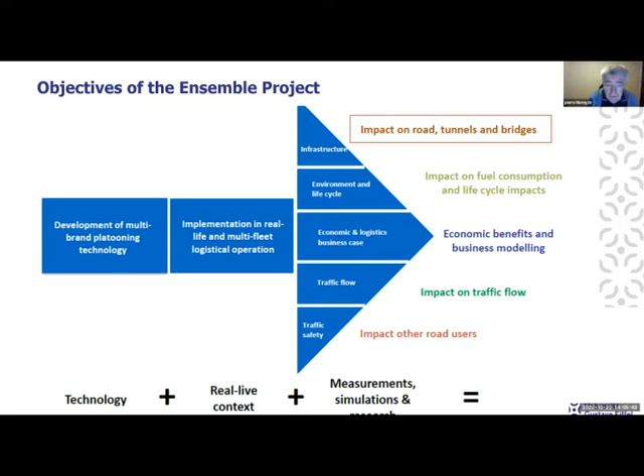You can find information about all this in the project, but our part was mainly on the impact on roads and also tunnels and bridges, though I will speak mainly about roads. So what is the impact of platoons on roads, especially on asphalt pavements? Because in France we use mainly asphalt pavements, very little cement-treated materials and concrete pavements. So we work on asphalt pavements.

If you look at the strains produced by a platoon, you can see here an example. The strains are different from what you get under a single vehicle, because you have several very closely spaced trucks. The effect is that you have an increase of strains under the second and third vehicle due to the viscoelastic behavior of the pavement. And if there is also control of the lateral position, you have reduced lateral wandering with the platoon, so you also localize the damage on the pavement.

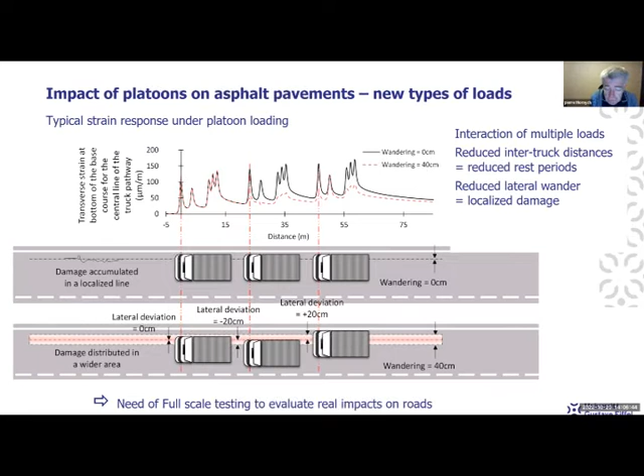Because the real behavior is relatively complex on the pavement, we decided it's necessary to start by doing a full-scale test to evaluate the impact of these platoons on roads. So we did a test on an instrumented pavement in the project, on a facility called the Idiada test track, which is located in Spain.

We instrumented a pavement structure for this test. The pavement structure included, as you see at the bottom, 3 asphalt layers: a wearing course, a binder course, and a base course. We instrumented mainly the binder course and the base course, with strain gauges and also with temperature sensors. The objective was not to monitor rutting, but mainly to monitor the strains and then evaluate fatigue of the pavement due to these strains.

We had about, I think, 30 strain gauges, placed longitudinally and transversally, at 2 depths and also at different lateral positions, in order to capture the effect of the wandering, the lateral deviation of the trucks.

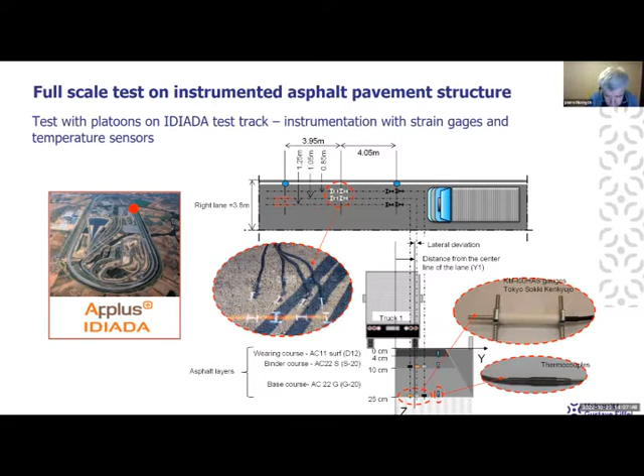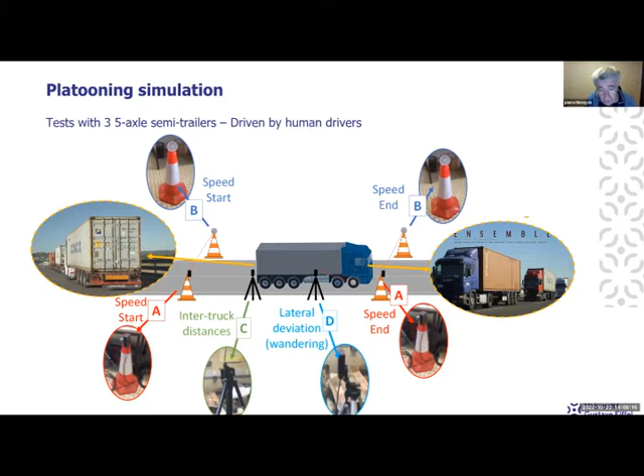We also needed to monitor the position of the trucks. The simulations were done with trucks driven by human drivers because it was done at the beginning of the project, and the platooning control was not yet fully operational. So we did it with human drivers. To monitor the position of the trucks, we used laser distance sensors, and we monitored the speed, the inter-truck distances, and also the lateral deviation of the trucks during the tests.

We had 3 trucks, and the idea was to compare the effect of passages of a single truck and effects of the passages of a platoon. Because asphalt pavements are very sensitive to temperature, we did the tests at 2 different periods, in the winter and in the summer. In each test campaign, we had different vehicle speeds. We had a lot of passes at 4 different speeds: 40, 60, 70, and 80 kilometers per hour. But we kept only one inter-truck time gap or distance, which was a time gap of 0.8 seconds.

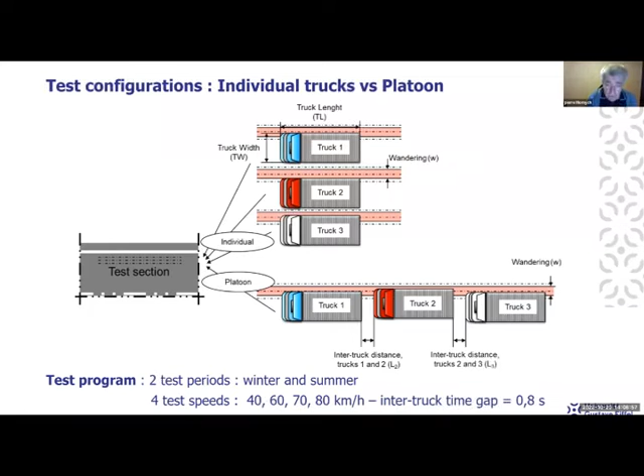We recorded a lot of strain signals under the passing of these different trucks. Here you can see examples of longitudinal and transverse strain signals at the bottom of the base course in the winter and in the summer.

Here you have an idea of the effect of the platoons. First you can see that the strains are much higher in the summer than in the winter. Then you can see that in the summer, you have increasing strains under the second and the third truck of the platoon due to viscoelastic behavior of the material. You also have delayed recovery after the passage of the trucks, which you can see here.

We also found that for our test, the transverse strains were higher than the longitudinal strains. So because we were interested mainly in the maximum strains, we looked mostly at the transverse strains.

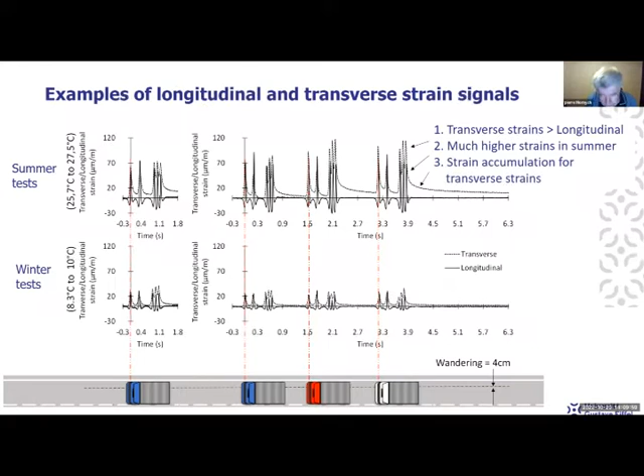First, just a comparison of the measurements. Here you have the maximum strain amplitudes observed under a single truck and under a platoon, in winter conditions on the left and in summer conditions on the right. You can see that in winter, with temperatures around 10 degrees, where the behavior of the pavement is more or less elastic or where the viscoelastic effects are reduced, you have practically the same strain levels under single trucks and under the platoon.

In summer, it's very different because the temperatures were higher, 25 to 27 degrees in the base layer. We had much higher strains under the second and third trucks of the platoon in summer than under individual trucks. And if you compare the change of strain between winter and summer, the increase of strain is also much higher under the platoons than under the single vehicles, due to strain accumulation effects.

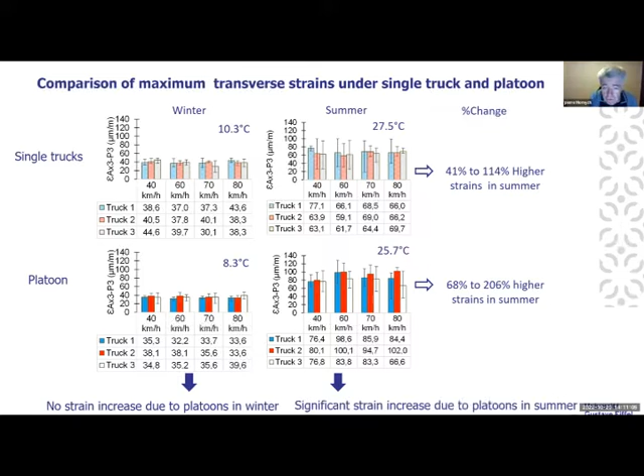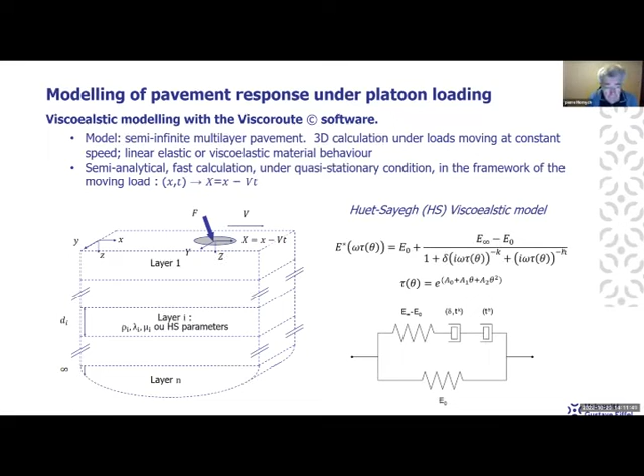The idea then in the project was to try to model and reproduce these effects. First we tried to model the viscoelastic response, using software developed at our university called ViscoRoute, which is a multi-layer viscoelastic calculation software. It calculates the response of the pavement in 3D under loads moving at constant speed, and the material layers can be linear elastic or viscoelastic. For the viscoelastic behavior, we use the Huet-Sayegh model, which reproduces very well the behavior of asphalt materials. So we first tried to calibrate the model on the measurements.

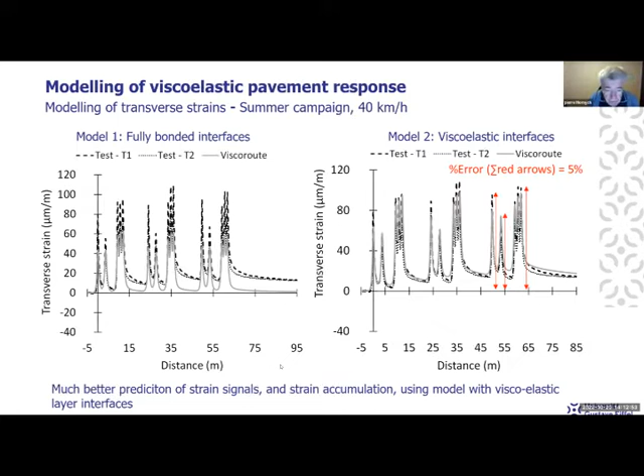Then we tried different assumptions, and we found that if we also model the interfaces as thin viscoelastic layers, we can get a much better reproduction of the measured strains - both the effect of strain increase under the second and third vehicle, and also the slow strain recovery after passage of the trucks. So we get much better results with the model using viscoelastic layer interfaces, and we calibrated this model on the measurements.

In the second phase, we also used this model to make parametric studies to see the influence of different parameters. Here you have an example: we studied the effect of lateral wandering on the strains. We compared first the case where the trucks were perfectly aligned with zero lateral wandering, and then where the three trucks were misaligned transversally with lateral wandering of plus 20 centimeters and minus 20 centimeters.

And you can see the effect. The black curve corresponds to the trucks with no wandering. You have a high strain accumulation after the passage of the second and third truck. When you increase the wandering, you reduce considerably the strains under the second and third truck, and you reduce the maximum strain level to which the pavement is submitted by spreading the loads laterally.

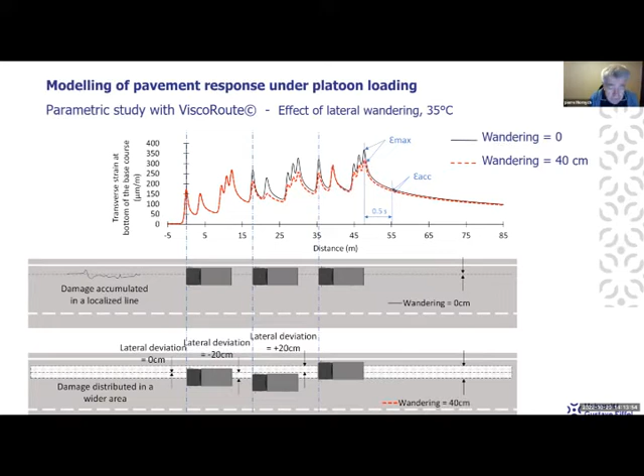We also studied the effect of the time gap between the trucks. Here you have simulations of transverse strains with 3 time gaps: 0.5 seconds, 2 seconds, and 3.5 seconds. With the short time gap, you have a strong strain accumulation. With the time gap of 3.5 seconds, which is relatively high, maybe higher than what you would apply in a platoon, you get practically no strain accumulation, similar to single trucks.

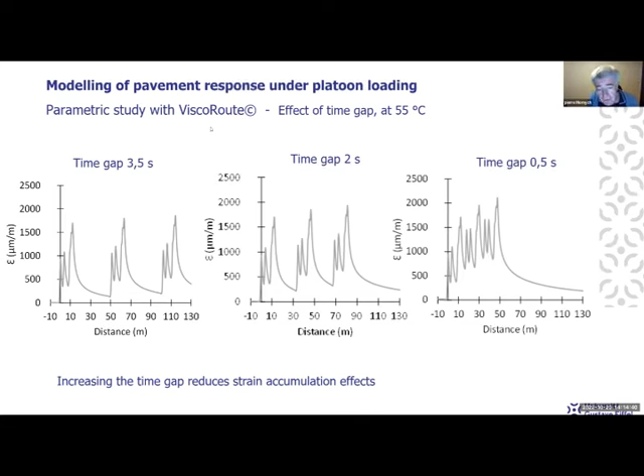So ViscoRoute, when it is calibrated on the results of the experiment, can be used to predict the effect of different truck configurations and to optimize the truck configurations to reduce the impact on the pavement.

And then we also tried to predict the fatigue behavior under platoon loading. For that, we used a fatigue model for multi-axle loads, developed in our laboratory a few years ago by Homsi. The normal fatigue law used in the French pavement design method relates the number of cycles to failure only to the maximum tensile strain.

In this multi-axle fatigue model, you have 3 other parameters: parameter NP, which is the number of peaks of the signal; parameter AN, which represents the surface of the signal, the average strain intensity; and D, which represents the duration of the strain signal.

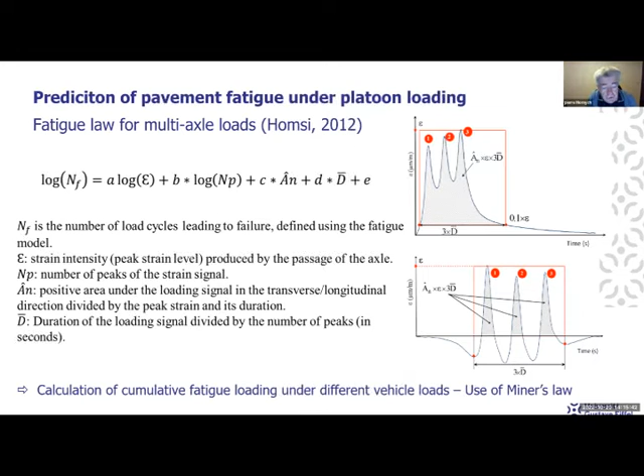So we calibrated this model for the material used in the tests, and we tried to calculate the cumulative fatigue loading under platoons.

So we compared different scenarios: a reference scenario with no platoon, only individual trucks, and then 4 scenarios with platoons. In scenario 1, platoons ran only in winter and individual trucks in summer. Scenario 2 was the reverse: individual trucks in winter and platoons in summer, half the year during the cold period, half during the hot period.

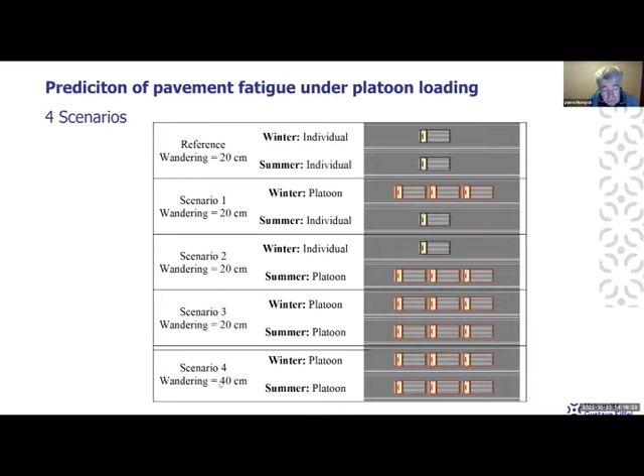In scenario 3, we had only platoons in winter and in summer. In scenario 4, we had also only platoons, but with a larger lateral wandering, 40 centimeters instead of 20 centimeters. We tried to predict the fatigue life with these different scenarios for the pavement tested in our experiment.

Here you can see the results in terms of fatigue life leading to a damage of 20%. It's a method of calculation of damage that we use in the French design method. So you have the fatigue life, or the remaining fatigue life, since it was an existing pavement, for the different scenarios.

You can see that between the reference and scenario 1, when you have platoons only in winter, there is no difference. You have the same fatigue life.

In scenario 2 and scenario 3, where you have platoons in summer, you reduce relatively considerably the fatigue life. You reduce it by almost a factor of 2.

And then in scenario 4, when you increase the lateral wandering, you improve the fatigue life again. You are not close to the reference, but you are between the reference and the worst scenarios.

So the conclusion is that the increase of pavement fatigue due to platoons is observed mainly at high temperatures, where you have these strain accumulation effects. Otherwise, the strains are the same as under an individual truck, so there is no difference in fatigue. By increasing the lateral wandering, you can significantly reduce this fatigue phenomenon.

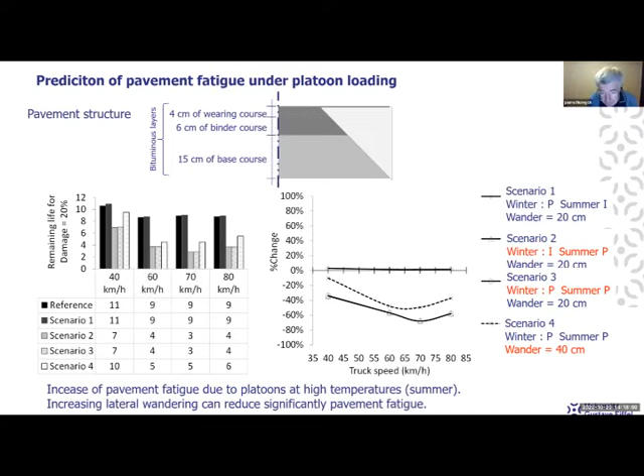We also did other simulations for other conditions, but this is just to give you an idea of the type of work that we did.

So from the full-scale testing, we found that there is a significant increase of strains under platoon loading due to the viscoelastic behavior of asphalt layers. This effect is mainly observed at high temperatures, when the behavior of the pavement is strongly viscoelastic.

Then with the viscoelastic model, we found that a model with viscoelastic layers and viscoelastic interfaces reproduces well the platoon strain signals. We were able to use this model to predict different platoon configurations, and possibly to optimize platoon configurations to reduce impact on roads or to reduce maximum strains.

And then with the multi-peak fatigue model, we were able to predict the fatigue under platoon loading, and we found that there is an increase of fatigue mainly at high temperatures, and that fatigue can be reduced by increasing lateral wander and also inter-truck distances.

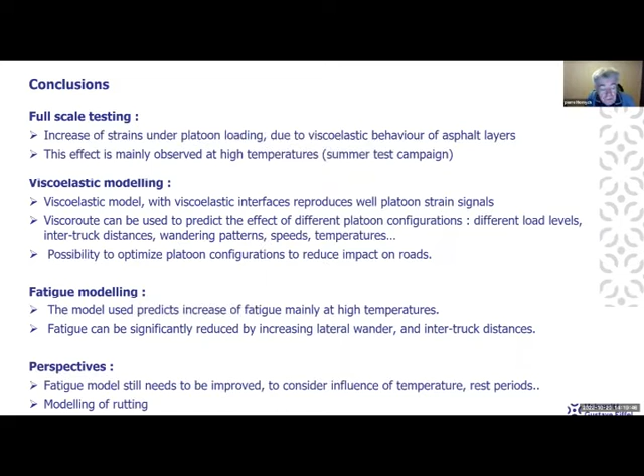We are still working on this project, and we would like to improve the fatigue model, because it takes into account multiple loads but doesn't take into account well the influence of temperature. For example, fatigue at high temperature should be improved, and this effect is not taken into account, and it does not take well into account the rest periods between loads either. So we would like to improve it first through laboratory testing, and then develop a better fatigue model. We were also thinking of trying to model the rutting under multiple loads.

Now I will pass to the second part, development of infrastructures for charging electric vehicles. As electric vehicles develop, people try to find new solutions for charging heavy vehicles. For heavy vehicles, there are several solutions to reduce carbon emissions or energy consumption: the use of biofuels, electric batteries, hydrogen, and also electric road systems, which can be used to charge vehicles by the road. In France, we are looking very seriously at this solution of charging electric vehicles by the road.

It consists of charging the battery by different methods to improve the range of vehicles without the need for very heavy or expensive batteries. There are three main technologies now tested or developed in Europe: conductive charging by catenaries, like a train, with catenaries above the truck; conductive charging by the ground, using metallic rails in the road; and inductive charging, using the induction phenomenon, with coils placed in the road and in the vehicle, transferring current from the road to the vehicle.

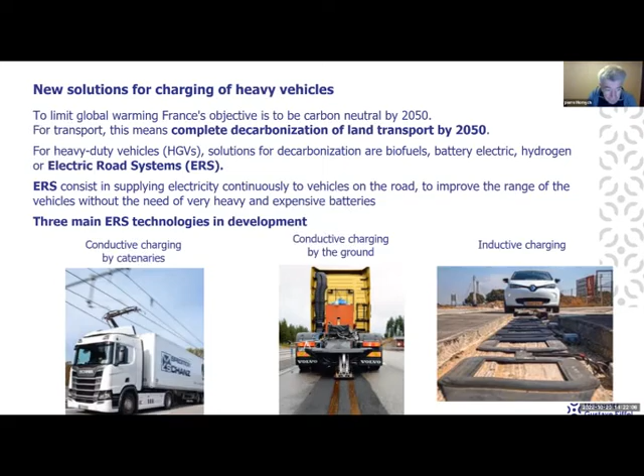So there is a strategy in France to develop, possibly before 2030, electric roads, and the Ministry of Transport has defined some objectives. In terms of power requirements, a heavy vehicle needs a supply of 350 to 400 kilowatts, a very high power supply. This leads to a power capacity of about 3 to 4 megawatts per kilometer on the motorways, since you have several trucks on each kilometer.

The idea also is to equip about 80% of an itinerary, avoiding certain difficult areas like bridges, tunnels, or interchange areas. The objective, I don't know if it's realistic, would be to develop in the first phase a network of about 5,000 kilometers of electric roads on motorways by 2030, and then in the second phase, 4,000 more kilometers by 2035.

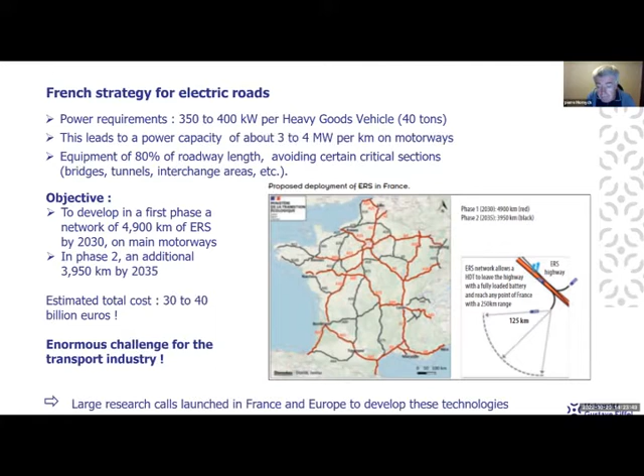It's a huge project because the estimated total cost of this infrastructure is between 30 and 40 billion euros, almost the same cost in dollars. It's an enormous challenge for the transport industry to try to develop these solutions, and to promote these technologies there are large research calls launched currently in France and Europe.

For the road integration of these systems, there are a lot of challenges. It's necessary to adapt pavement design, pavement modeling, and also construction and maintenance approaches to take into account these charging systems integrated in the road. For inductive systems, this consists of loops protected by a kind of protective box or block, placed at low depth in the middle of the road lane, then covered by a thin surface course.

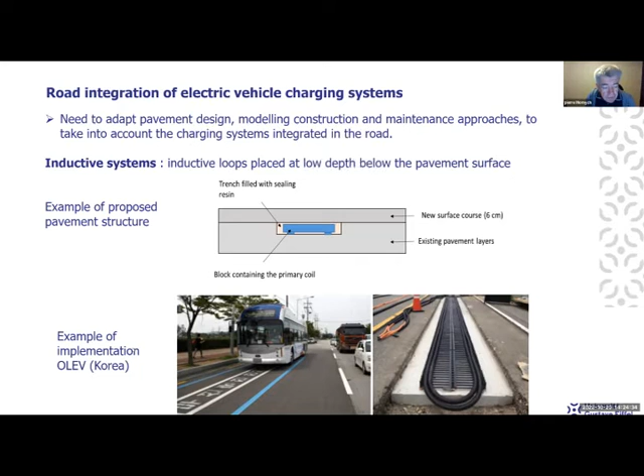Here you have an example of a solution which already exists, developed in Korea by Olev, which is an inductive charging system for buses.

For this inductive charging, there are many integration challenges. First, it is necessary to select materials which will ensure protection of the charging system, and which are also compatible electromagnetically with the induction principles. There is a problem of charging efficiency of the embedded coils, which depends on the depth of installation and is also very sensitive to the lateral alignment of the vehicles. Of course, there is also the resistance to traffic loads.

These systems are embedded at low depth and create discontinuities in the pavement, so it's necessary to ensure resistance to traffic. With inductive charging systems, there are also heat losses during operation, which increase the temperature in the pavement and can impact pavement behavior. There is also a problem of resistance to thermal variations, because the different systems buried in the road have different thermal properties, in particular different thermal expansion properties from the pavement materials. If you have large temperature variations, this can create differential displacements and cracking.

With inductive charging, there is also a risk of exposure to electromagnetic fields. So the systems must be shielded to protect people from these fields. And there is a necessity to develop models to model thermomechanical response and also to design these systems.

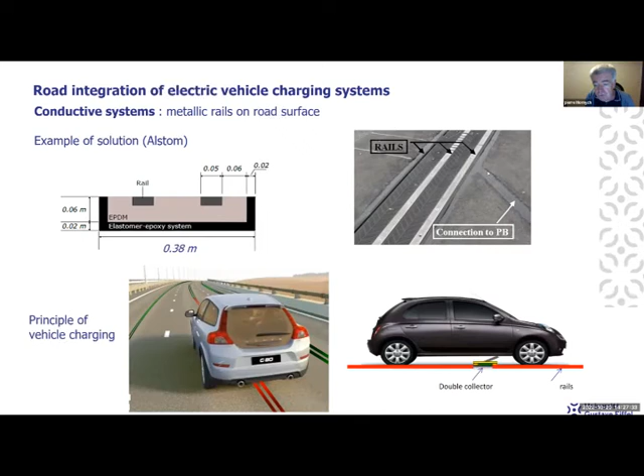So you can see here an example of what they developed. You have the two metallic rails, and you also have a kind of metallic cable to avoid stray currents. Here you can see the elastomeric surface of the support, and you also have cable connecting the rails to the electric supply.

So there are also lots of challenges with the integration of these conductive charging systems. First, the material selection for the rail support and also the bonding of this support with the pavement, the resistance to traffic loads again with the presence of discontinuities, and the resistance to thermal variations.

There are also road safety issues because you have the metallic rails on the surface of the road, so there are problems with skid resistance and evenness of the road. In particular for motorbikes, having these rails on the surface can be a problem, and it could be dangerous.

You also have electrical safety problems because you have these electrified rails on the surface of the road, but they are electrified only by small segments, about 20 meters long. So it's not the whole lane which is electrified, only the part under the truck. There are also problems of winter maintenance because you cannot use classical salt to de-ice the pavement due to the electric system, plus questions of road maintenance with the embedded rails, and again modeling and design of these systems. So again, I will speak only about the items in red.

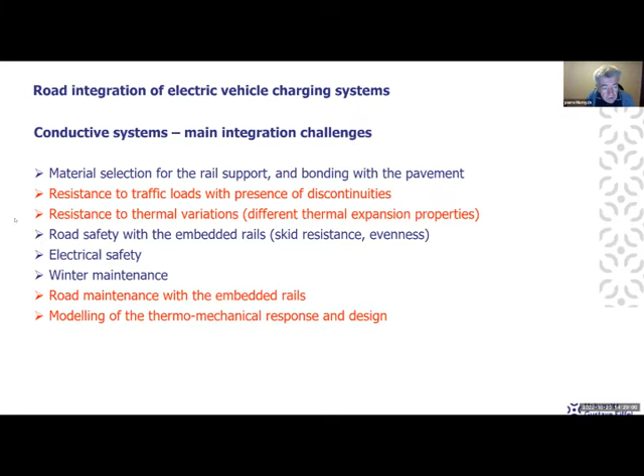For these problems of integration of electric supply systems in roads, we have worked recently in a big European project called INCIT-EV. It's a European project with a duration of 4 years, from 2020 to 2023, and which has 33 partners. The idea of this project is not really to develop new systems, but more to develop demonstrators of these systems, to demonstrate their efficiency and to monitor their performance in different countries and different conditions.

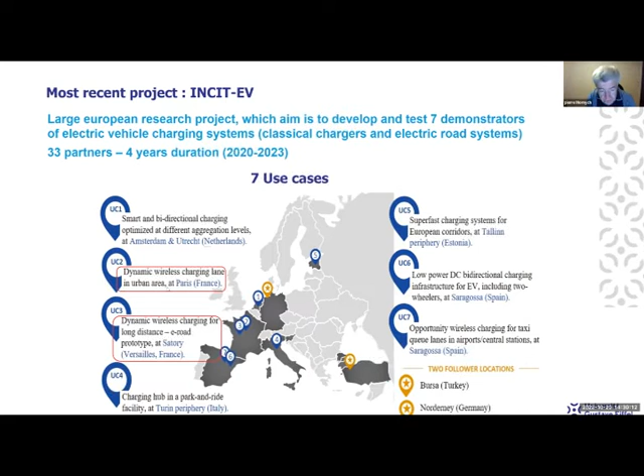So there are 7 demonstrators, and there are 2 demonstrators in France, called use case 2 and use case 3, which concern dynamic wireless charging by induction, either in urban areas or in interurban long distance roads. We are involved in developing these two systems, but I will speak only about the system developed for urban roads.

So we are contributing to the development of the demonstrator for inductive charging with 2 partners. One partner is Vedecom, who is developing the electric charging system, and the other partner is Colas, a big French road construction company. The objective is to develop a 30 kilowatt power charging system designed mainly for cars and light utility vehicles. For induction, the power which can be transmitted is for the moment a little bit limited, so it's more suitable for cars and light utility vehicles than for heavy trucks. But the idea is also to upgrade it, to increase the power and adapt it to heavy vehicles.

So here you have an idea of the system layout. You have these coils, consisting of copper wire protected by a box, which are in the middle of the road lane. Then on the roadside, you have the electric supply: inverters in a trench, one inverter per coil, which supplies the high frequency electric current to the coil.

And then you have a transformer which provides the current which supplies the whole system.

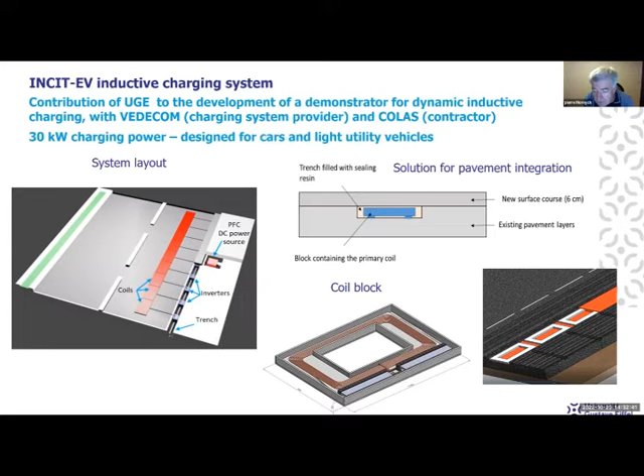The idea is to use it on existing pavement: create a trench in the pavement, install the blocks in the middle of the pavement, seal them with a special resin which ensures good bonding with the asphalt layer, and then cover it with a thin new surface layer. Here, on the right bottom, you can see the layout of the system in the road before it is covered by the surface layer.

To develop this system, we realized it is necessary to develop specific tests to validate both the performance of the system and the resistance of the road. It's a very challenging task because you have to adapt the test, the material selection, and the road design to this new system.

We tested the performance in different conditions, with different thicknesses of asphalt material and different positions of the secondary coil, in particular testing the effect of different misalignments between the primary and secondary coils. With this, it was possible to optimize the charging system.

Then we had this problem of heat losses during charging. To evaluate the heat losses, we did tests of performance of the coils, but not with asphalt materials. We did it with a granular material, because Vedecom wanted to be able to install and remove the coil several times and change the parameters of the test. We decided to use a granular material with no cohesion because it was easy to embed and compact the material after placing the coil and then removing it again.

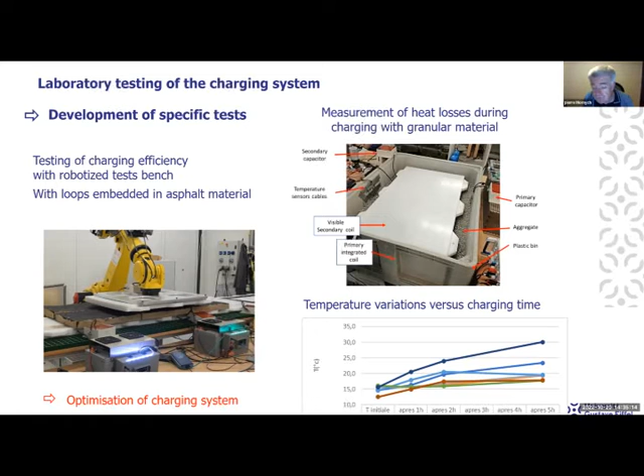We did different tests with different distances and positions of the coils, also with dry and wet material, and during operation we measured temperature variations at different points with temperature sensors. We found that in the laboratory there was a very significant temperature increase when the system was operating, reproducing charging cycles representative of vehicle charging on the road. We found temperature increases of 15 degrees after several hours of operation.

We also wanted to test the mechanical behavior of the system in asphalt layers, so we proposed two tests. First, we did wheel tracking tests, which reproduce the loading by a wheel on a small scale specimen. We built small scale specimens with two asphalt layers in which we embedded these coils.

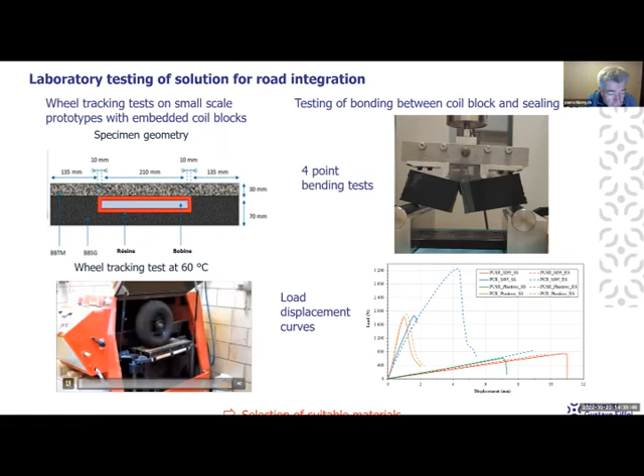The wheel tracking test is normally used to test the rutting of asphalt materials, and consists in applying a rolling wheel load on a plate. We used this test on these specimens and tested different materials for the coil block and for the resin used to seal the block in the pavement. We were able to select appropriate materials for the block and for the resin.

To test the bonding between the coil block and the sealing resin, which is also very important because the system will behave well only if it is bonded, we did 4-point bending tests on specimens with two materials: in black the coil block material and in gray the resin. We tested the bonding resistance between the resin and the coil block, and were again able to compare different resins and select the best possible resin.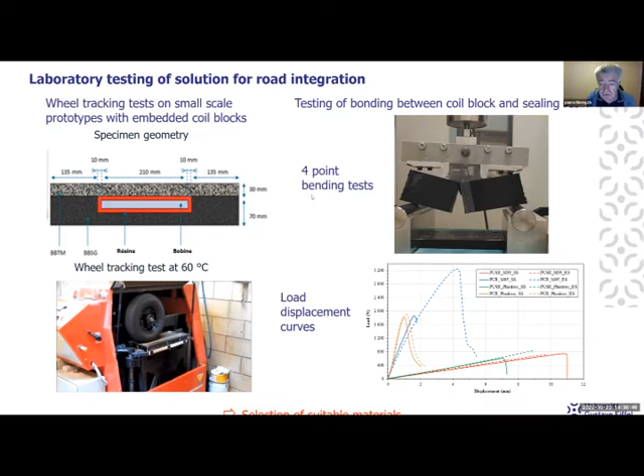Then we tried to do modeling to predict the behavior of the system in the pavement. We tried two types of modeling: thermal modeling, to simulate the effect of temperature variations on the systems and the effect of heat generation by the coils in the pavement, and also simulations to simulate the effect of traffic loading on the system.

We did it first separately for the thermal behavior, the mechanical behavior, and the traffic loading, but it would be desirable in a second phase to do a coupled thermomechanical modeling.

For the thermal modeling, we were interested mainly by hot temperature conditions, because for the asphalt layer, what is important is to know what maximum temperatures will be attained in the system. So we simulated temperature variations corresponding to summer conditions: air temperature variations, sky temperature variations, and also sun radiation. We proposed to simulate cycles of these temperatures to simulate daily variations.

Then we added the heat loss due to the charging system. From the laboratory test, we estimated the heat flow that would be generated when the system is in operation, which was about 80-90 watts per meter of length of the coils. So we simulated this heat flow.

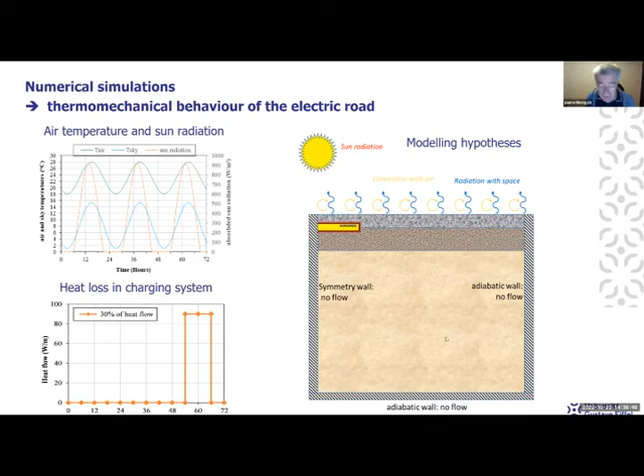This is the kind of model that we simulated, in 2D. Here you can see the block with the coils and the pavement layers, and here the subgrade. Here is the finite element mesh, so it was a 2D finite element thermomechanical calculation.

We simulated these cycles: first only the temperature cycles, and then we added the induction power, and we simulated also the heat increase due to the charging. We tried to predict the stresses, the strains, and the temperatures in the system.

Here you can see what happens when the temperature varies. You can see that when the temperature increases, here it's only the pavement temperature, you generate higher temperature near the surface. And because the thermal properties and thermal dilation properties of the coil and of the asphalt concrete are different, you generate stresses and strains, in particular at the interface between the block and the pavement.

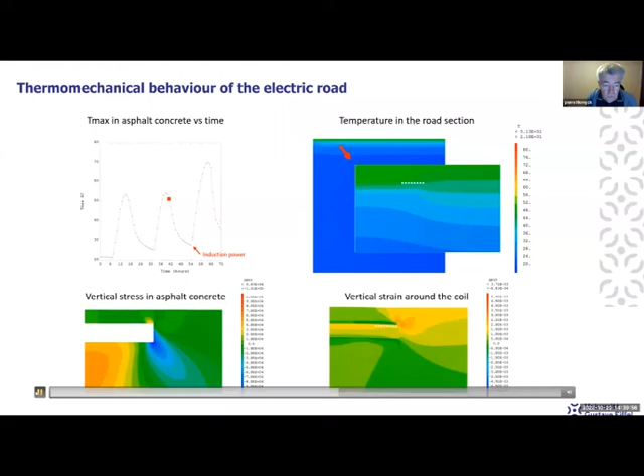And when you add the inductive charging, the temperature increase is higher. So you exacerbate the phenomenon, you increase the stresses and strains, and you increase the temperature.

So here is an example. We tried different scenarios, but here is an example of maximum calculated temperatures. You can see that the summer temperature generates temperatures in the top of the asphalt layers of about 50-55 degrees. And when you add the inductive charging, you can reach temperatures close to 70 degrees Celsius in the asphalt layer and even more in the coil block.

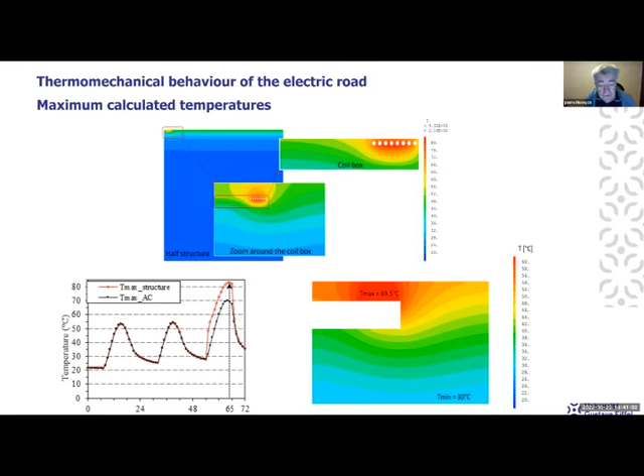This means that in this scenario, in very hot summer conditions, you have temperatures exceeding the maximum temperature which could be allowed with a normal asphalt material. In France, we consider that typically the maximum temperature to avoid excessive rutting is about 60 degrees. So with these charging systems, you can exceed this temperature in hot summer conditions.

And here you can see the stresses and strains generated. We have to continue this work, but it is clear that you generate stresses and strains, especially at the corners of the coil block when the temperature increases.

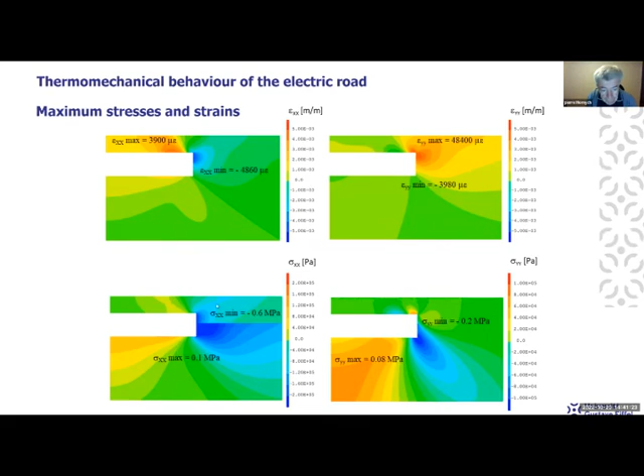We also did some mechanical modeling of the mechanical behavior under wheel loads. For that, we did in the first approach 3D elastic finite element calculations. We simulated again the pavement with the embedded coil block, and we simulated loading by a standard French heavy vehicle axle, which is a 130 kilonewton axle with dual wheels.

We simulated the properties of the different materials, and we calculated the stresses and strain fields for the heavy vehicle axle loads at different positions of the axle: positions where the coils are in the center between the wheels, and also positions where the wheels are on top of the coils or on the corner of the coils, to see the different effects when the loading is on the coils and when the loading is on the side.

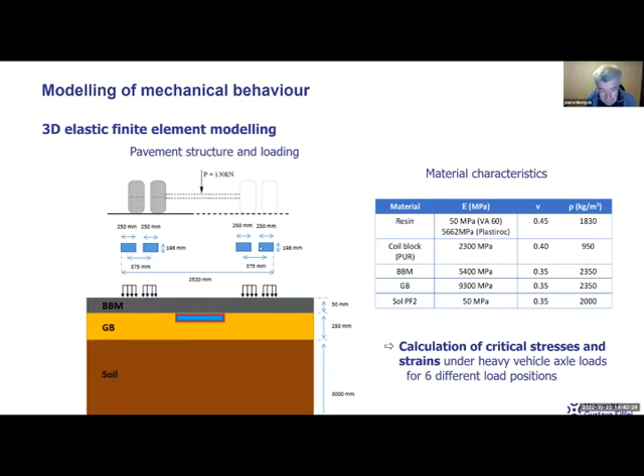So here you have some examples of calculated stresses and strains. We look mainly at maximum principal stresses and maximum principal tensile strains. Here in the first case, the coil block is here and the loads are applied on both sides, which is the normal position of the vehicle when the block is in the middle of the lane. You can see that in this case, the load is far enough from the coil and there is practically no influence of the coil on the behavior of the pavement. You get normal behavior with maximum tensile strains at the bottom of the asphalt layer.

But when you apply the load directly on top of the coil, then you generate different stresses and strains on top of the coil and also on the corners of the coil. So the critical loading case is where the wheels are centered on the coil. It's not the normal situation—it's only the situation where the vehicle will change position on the lane or change lane.

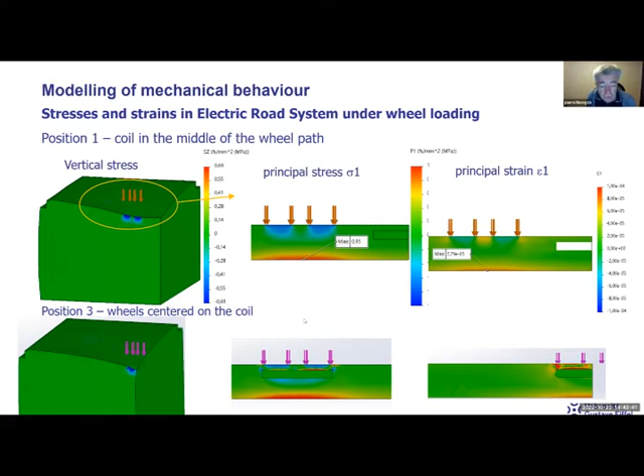So in fact, the number of load applications in this situation will be reduced in comparison with the number of passing trucks. And so we tried with this mechanical model to predict the maximum stresses and strains for different wheel positions: position 1, where the coils are in the middle of the wheel path; position 2, where the wheels are at the edge of the coil; and position 3, where the wheels are centered on the coil.

And we calculated the critical stresses: the maximum principal stress sigma 1, the maximum vertical strain epsilon z, and the maximum tensile strain at the bottom of the asphalt layers, epsilon 1. We did these calculations with different materials for the coil, and especially for the resin which seals the coil in the pavement.

Here you can see the difference in results between a calculation with the resin called VA60, which is a very soft resin, and another resin called Plastiroc, which is a stiffer resin with a modulus very close to the asphalt material.

And what we found is that if you use a very soft resin, you have a soft support under the surface asphalt layer, and you increase a lot the tensile stresses and tensile strains in the asphalt layer, especially for position 3, where the wheels are centered on the coil. There you get a very high tensile stress and a very high tensile strain.

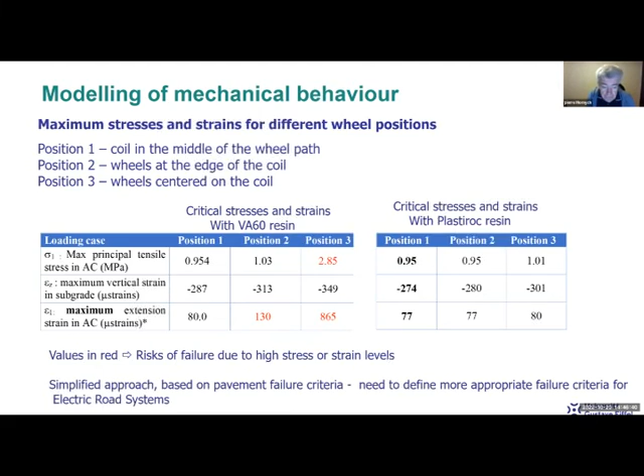So just in conclusion, our first conclusion is that to study these electric road systems, it is necessary to develop specific tests and models, which are not the standard models used for pavements. And for testing, there is a need to select specific tests to evaluate these solutions.

And there is a need to select suitable materials, to evaluate both the mechanical and thermal behavior, to evaluate the behavior of the interfaces, and also to look at the thermal expansion properties of the materials. Then you need to evaluate the heat losses during charging and take this into account.

And we found that it is necessary—and we tried—to do tests at different scales, starting with material properties, small scale laboratory tests, and then going to validation by full scale tests or full scale prototypes.

And for modeling, there is a need to develop coupled thermo-viscoelastic models to take into account both the thermal behavior and the mechanical behavior. And there is also a difficulty: it is necessary to define appropriate failure criteria for these solutions, especially for cyclic loading. You cannot just use the standard failure criteria for asphalt materials.

And validation of the models by appropriate tests is essential. So the laboratory tests that we did were used to develop the models. And the next step in our work will be to do a full-scale accelerated test to test the inductive charging solution at full scale.